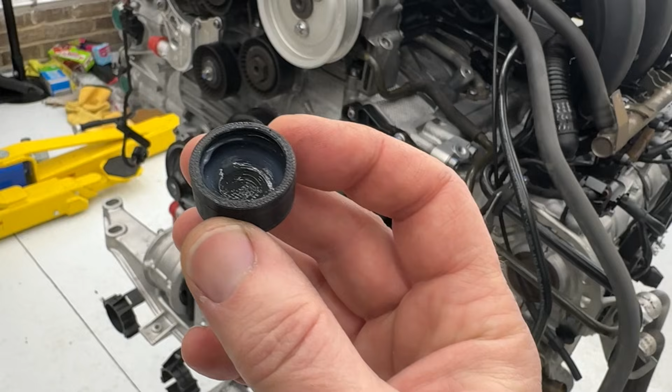All right, I got this cap 3D printed and I got some Dreibond on the inside. Jake is gonna make some of these production versions in aluminum, and you can see there will be a little place for an O-ring, but mine is gonna be the permanent version with the Dreibond. So that is going to go right over here. Smack that on, and that is gonna prevent any future leaks out of that joint.

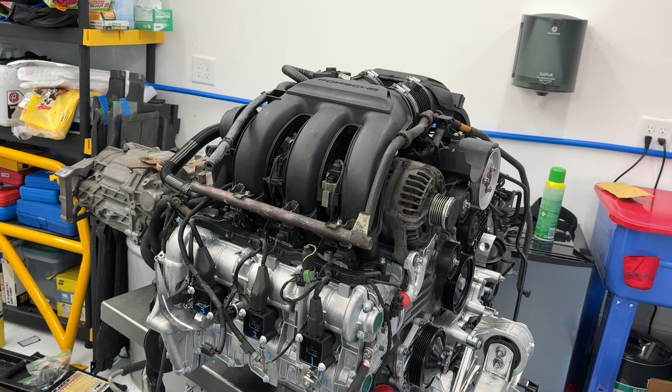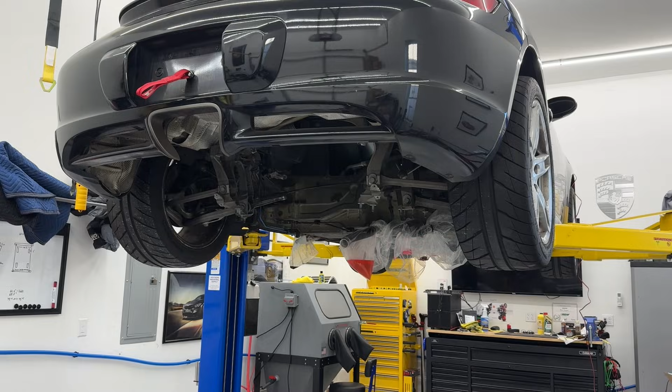And through the magic of YouTube videos, our engine is completed and is ready to go back into here. Pushed the car out of the trailer yesterday, back up onto the lift. I'm gonna cut some of these bags off. I don't know how this bag survived dragging on the ground, in the trailer, out of the trailer, in the trailer, out of the trailer a second time, but it did.

So gonna cut these off, gonna push the engine into position, start lowering the car onto it and making all the connections. So again, did this in the 997 video. Any differences that I do, I'll try to document here, but check out that video for a pretty detailed reinstall.

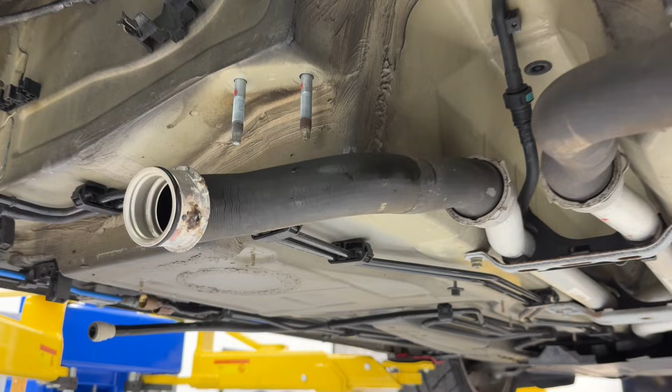All right, this hose right here I noticed is pretty nasty right there. So I'm just gonna take this hose off and vapor hone that area to get it all cleaned up. Seems like it could cause leaky type issues if left like that. All right, this looks much better now.

All right, the other prep that I'm gonna do a little differently this time is this cable here that is our emergency brake cable. These two lines right here and right here have to go tucked in behind this, and they clip in right here. So in the past I've raised the engine and then bent the lines and tucked them in there, and it's really sketchy. It always feels like they're gonna possibly break.

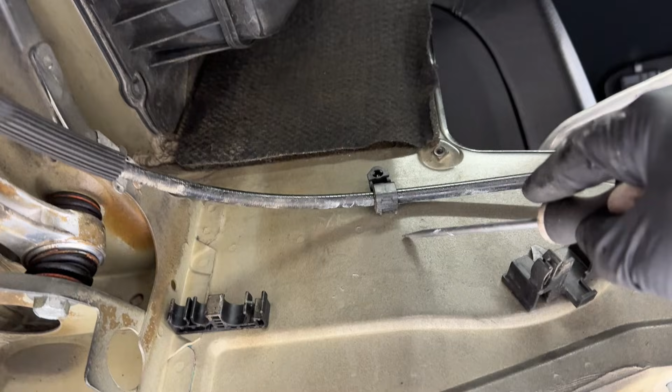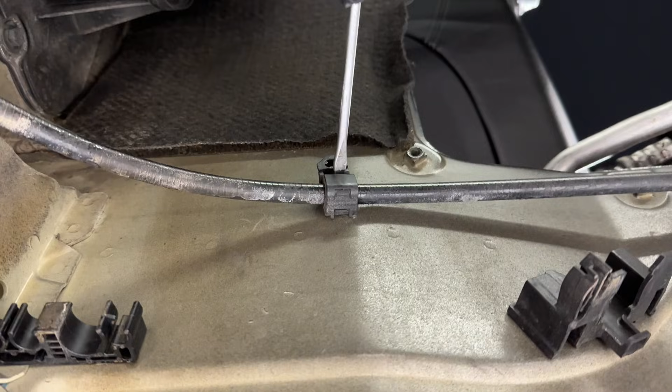So this time I'm gonna try to unclip this from right here because it is a little bit flexible. Maybe I can pull this line out of the way some so I don't have to bend the other ones as much. And I'm trying to remember how I undid this before, if it's just a flathead up here. Try not to break it. Oops, something popped. Okay, I think that's it.

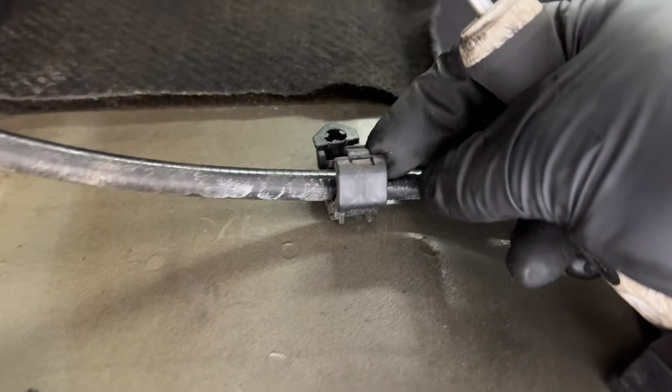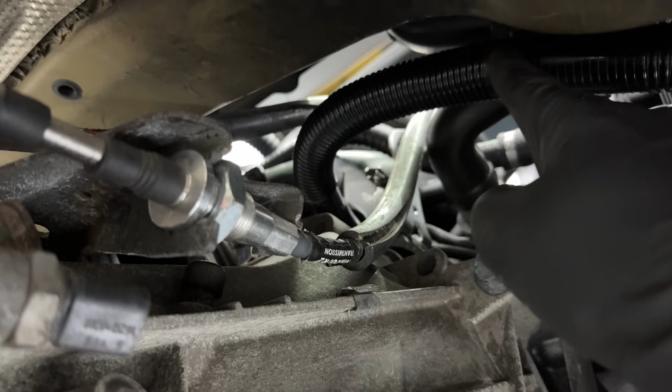Yep. So you just pull down that little tab and it'll unclip it so that this can be loose. And yeah, it gives me a little bit of flex to try to work with this. So I'll leave that like that before starting the engine install. All right, so I had to make sure that I fed my passenger side shifter cable under that hose because it was on top just naturally, and it started getting caught as I lowered the engine.

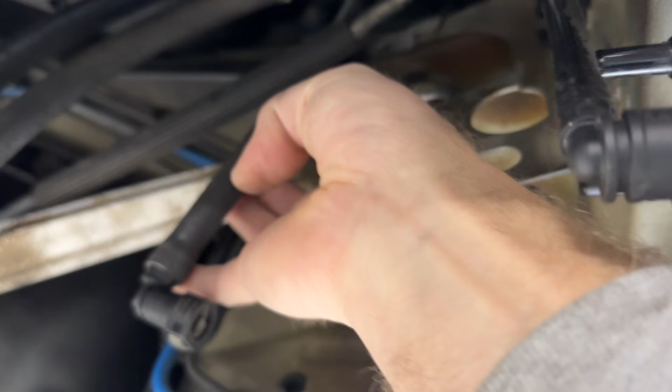All right, so I just figured out the easier way to get these two on the correct side of that cable. When you do loosen it like I did, you do have a lot more play. So you can bend these up this way, and then this one will bend far enough over to tuck them behind over this way instead of stretching it up like I did last time going that direction.

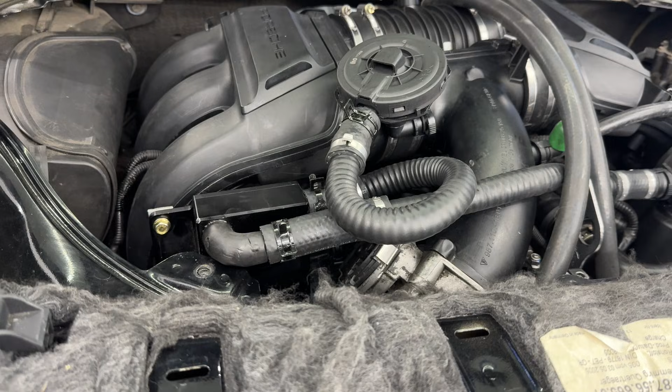All right, so my ultimate AOS, this elbow was catching on the bottom of here, so I had to come and push it out of the way and slowly bring it up and keep an eye on that corner there. I've got enough thread sticking through to get the bolts for the engine mount bracket on.

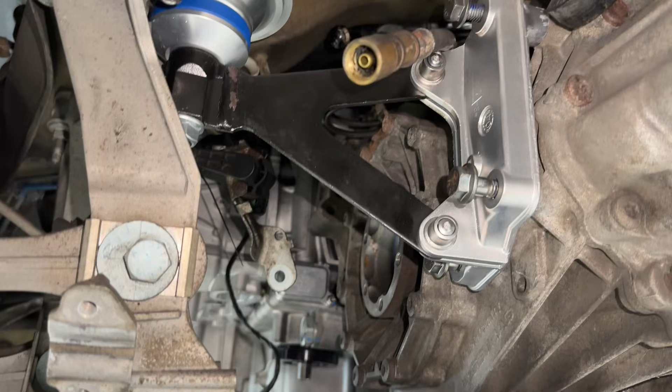All right, putting the transmission mounts back in, bolt through the top, nut on the bottom. These are both 13 millimeter. These go to 17 foot-pounds. These are 15 millimeter. On this side, the longer bolt goes up here, two shorter bolts down here. On the other side, all three bolts are the same size. These go to 48 foot-pounds. All right, these engine mount nuts, all four of them are 15 millimeters, and they go to 34 foot-pounds.

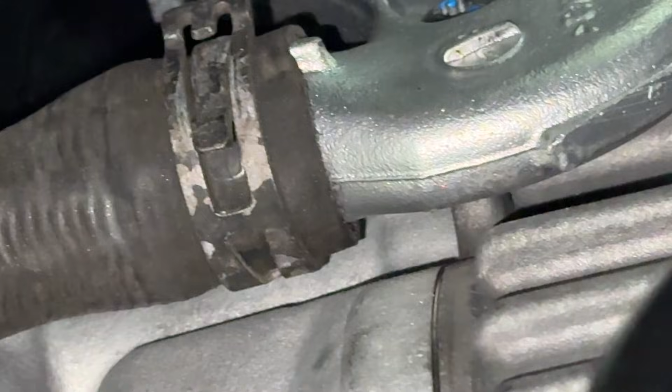All right, one thing I could have done before I put this back on the car is this tube here that connects to this guy. Can't really see it. Let me zoom in. That attaches right up there to that guy. It's a little bit of a pain to get that hose clamp on, so if I would have remembered what direction it went on, I would have put it there. And the direction it runs is it just comes straight down the side, angles into him.

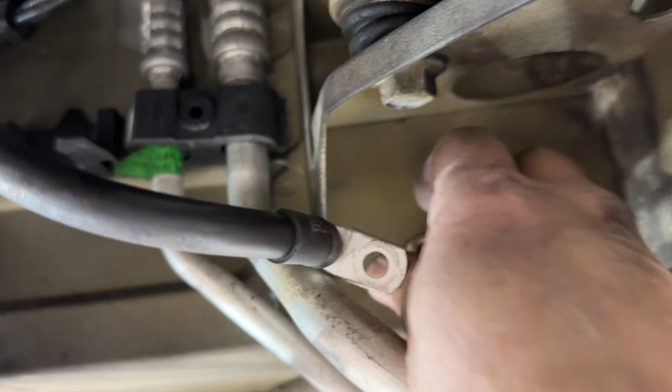I'm just gonna reconnect all my other hoses. Big guy goes here with this clamp. This little guy goes underneath to the green cap. My ground cable, I left the nut up here, so reattach him to the chassis.

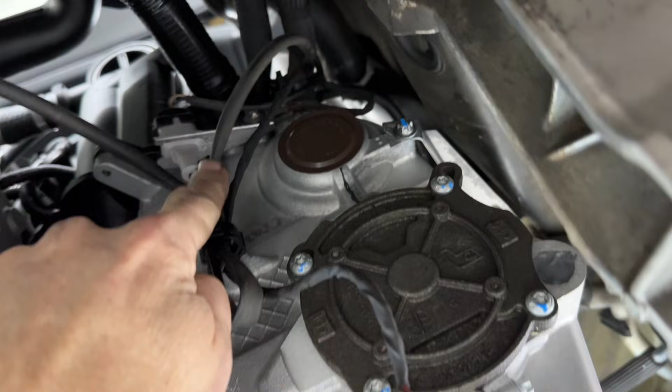All right, here is the bottom of my coolant tank, and this little connector gets connected here. That's the stock one, but this is the one to my Ultimate AOS, so I'm gonna connect him. All right, this cable that was dangling all the way down gets clipped into here as well, and actually goes over to the transmission and plugs in over there.

Our shift cable runs down here, and for us, we're gonna tighten this nut. It attaches into this bracket, and then this ball will snap into place up here.

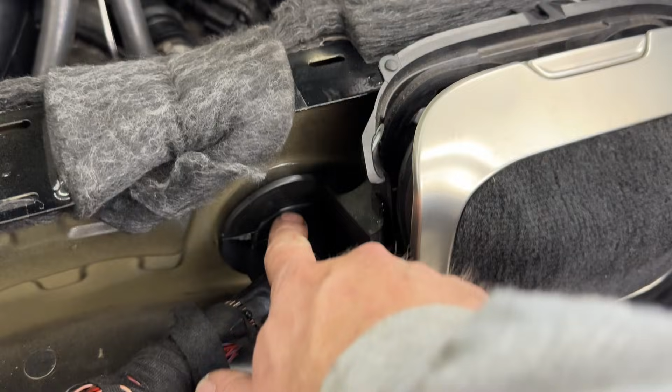All right, here's a fairly large and sticky pain in the ass to get this grommet so that it is even on both sides. It was pretty easy to pull it through incorrectly so that the back of it also comes through, and then there's too much on the inside. So what I did was I got the back part started first, and I got it in there evenly, and then kind of pulled the front around and got the seal to line up.

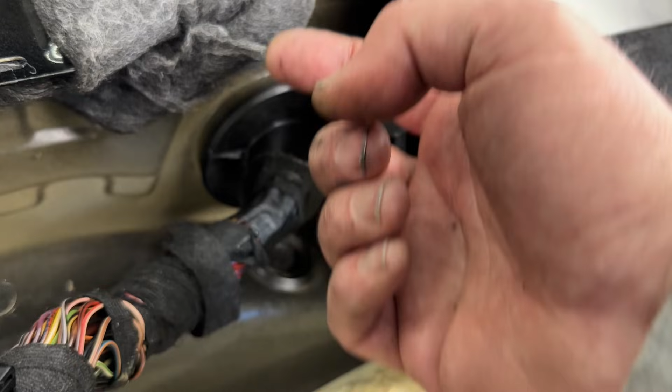After knowing how to do it the first time, it wasn't as bad. My suggestion is if you get too much through, instead of trying to push it back just a little part at a time like I was doing for a long time, just push the whole thing back through, and then start with the back and pull it in, and good luck.

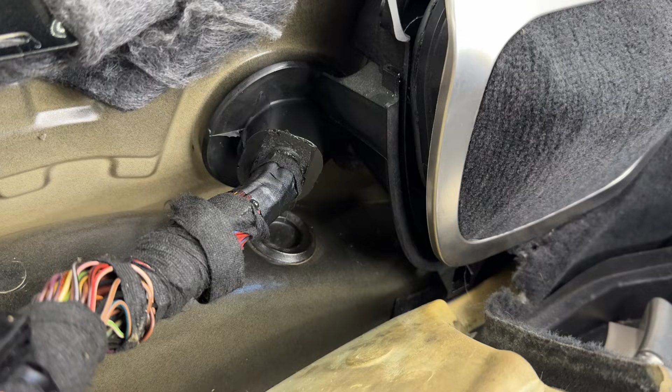So whilst I am up here, I'm gonna go ahead and do a couple other things. Gonna reattach to this tube here. Gonna reattach our fill tube here and lock it back in with a ring. Got our blue line reattached to this line, to the slave cylinder.

My little gray clip that I broke upon removal, I never did buy a new one. So there's supposed to be a little clip right here between the nut and that piece, I guess, to keep it from backing out. And this clip I never replaced, so I just zip tied it there. Both sides of the fitting for that were 15 millimeters.

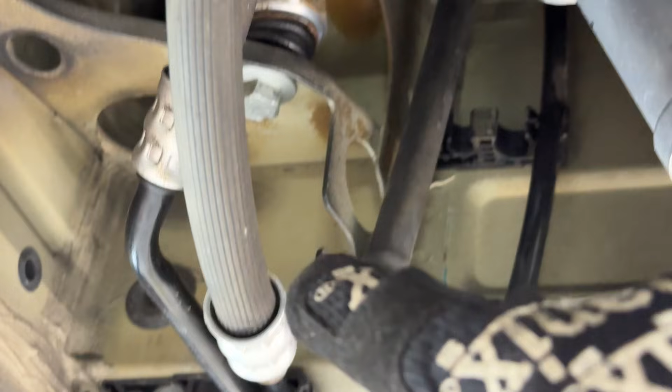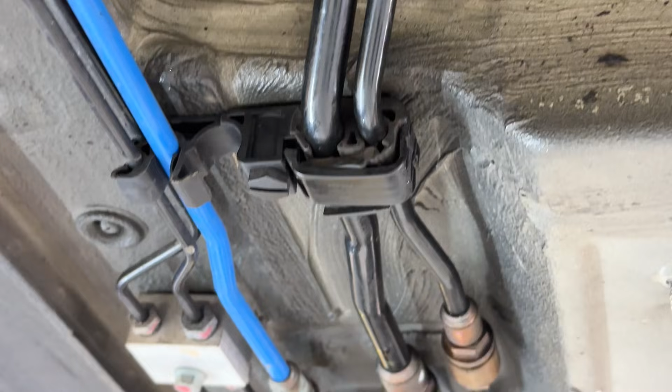And these two lines coming down, I went ahead and reattached like this, and then the rubber folds over, and then the snap folds over, and the same thing right here. So that's how they go. I have to retighten these two. The smaller one, these are also both 15 millimeters. Both sides of this one are 19 millimeter.

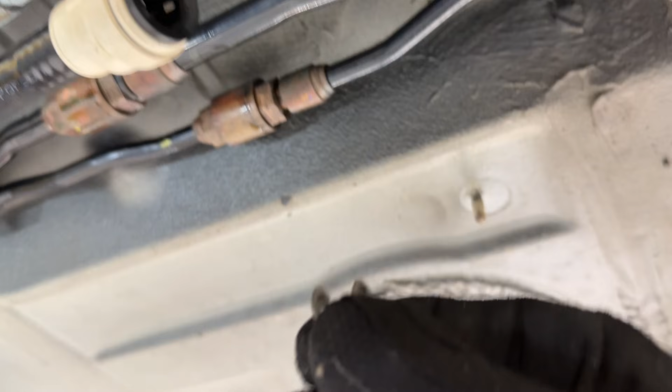All right, so the inside one here had this little gray clip. You can see it looks like that. They're very brittle, and it just slides in here behind the nut, and press that into place and gently hope that it does not snap. All right, that's how it should look.

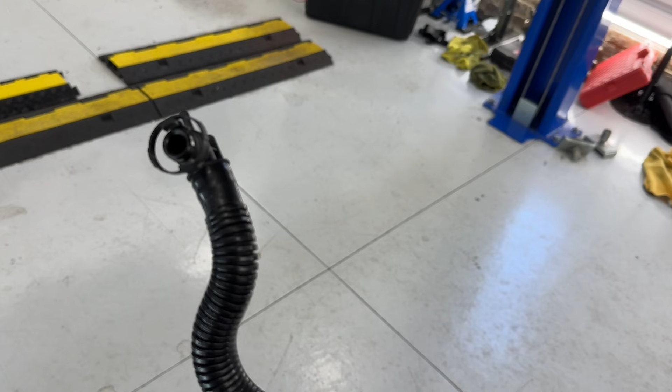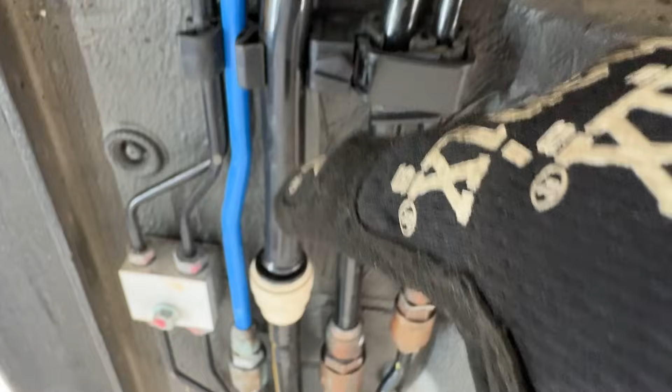I had removed this tube altogether. I'm gonna go ahead and replace it now. This end connects over here. This end snaps on right up there. So here is a shot of how it routes. Connected right up there, comes down over these guys, right into those grooves, and just a pressure fit there.

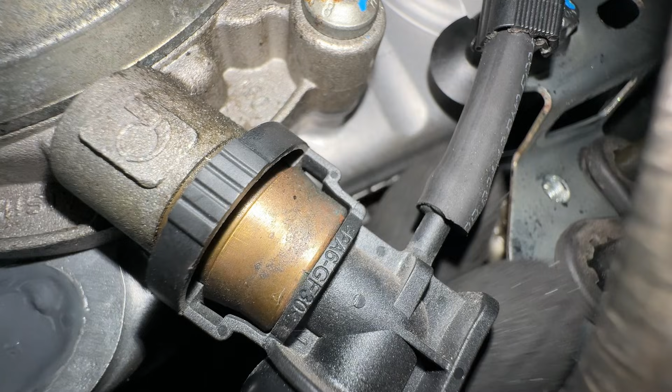All right, also remember when attaching this hose that at the very top of the hose, I don't know if you can see it here. Let me see if I can get my camera up there. All right, yes, right here, this vent line hose that we connected to this little piece when we had the engine out connects to the little nipple on the top of that. So yeah, don't forget that, or you will have a vacuum leak.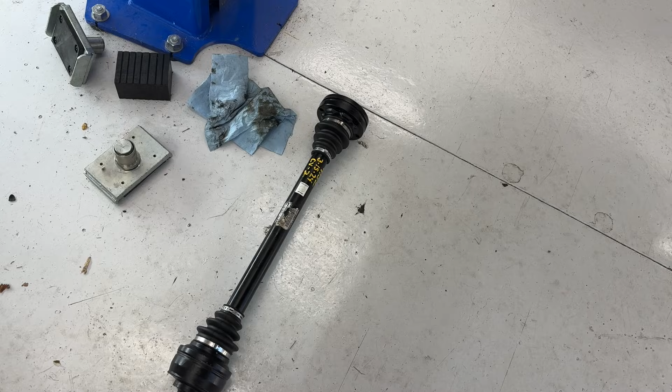I had my axles completely rebuilt while they were out of the car. One of them was leaking. Now they are both super nice, and time to go back into the car. Manual calls for Optimoly HT around the splines. Reading online, it seems like Permatex copper anti-seize is the same thing.

It's like a high temp anti-seize, and it makes sense that you would need it because that did not come off on my other one, and it ruined one of my axles because I could not remove it from the hub. It got heat welded on essentially.

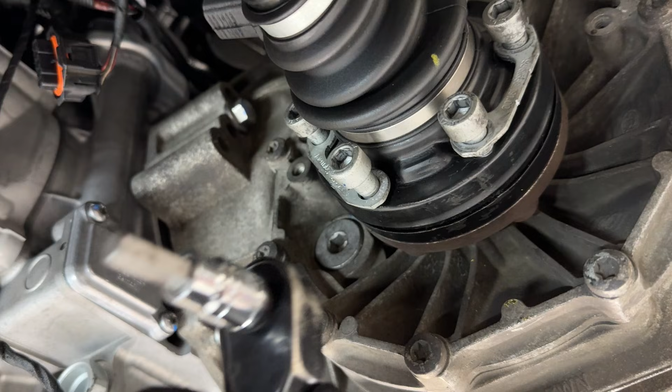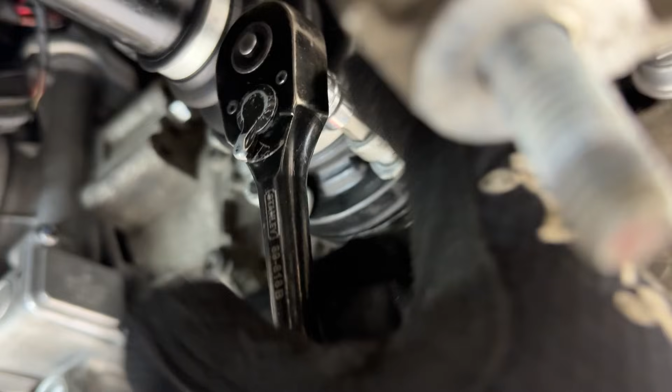All these bolts are 8mm hex, and I'm just going to hand snug them all down before I torque them to value. I did vapor hone them. I'm reusing these bolts. They just need to be clean. The threads need to be clean, and they are gonna go to 60 foot-pounds. And when I torque them down, I'm gonna do like you put on a tire, go opposite, and around. But first, just go around and get them all snugged.

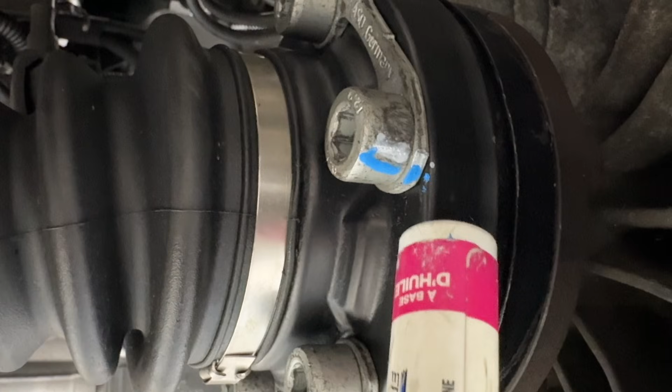And if you need to rotate one so you can reach it, all you have to do is grab a wheel with your emergency brake off, and you can rotate it, and it'll rotate both sides at the same time so you can get them both lined up. Just a couple notes before torquing. Go ahead and set that, and it'll prevent them from rotating. 60 foot-pounds. And when I witness mark them, I'm going to mark the bolt and the washer underneath them so I can just visually inspect to see if that bolt has been backing out at all.

All right, now that the car is in place and I don't have the special tool to tighten the spin-on oil filter adapter, I just used some giant adjustable pliers here and grabbed it and spun it on. Made a couple marks up there, but you know what? That'll be okay. Now I can complete the installation of this thing by connecting this from our oil filter adapter to the bearing.

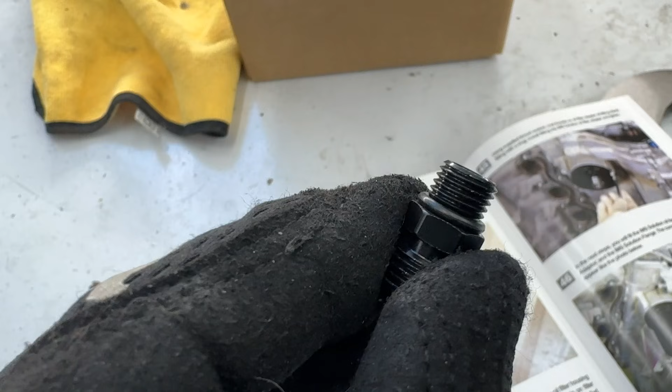Following the provided instructions, I'm going to take this black fitting here and I'm going to put some thread sealant on it and attach it and tighten it to the oil filter spin-on adapter. So put some thread sealant on these threads, and you can see there's a little O-ring on it as well. So this is oriented in the correct position away from the headers.

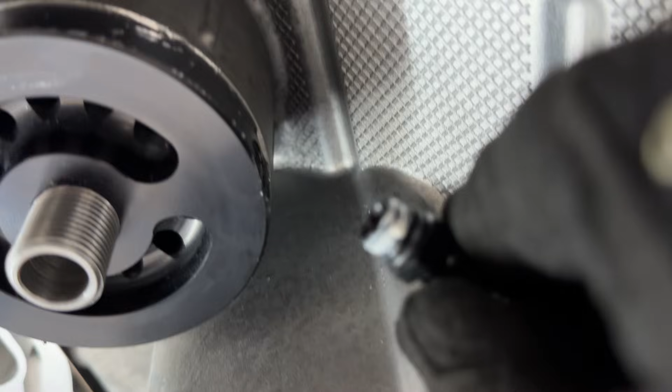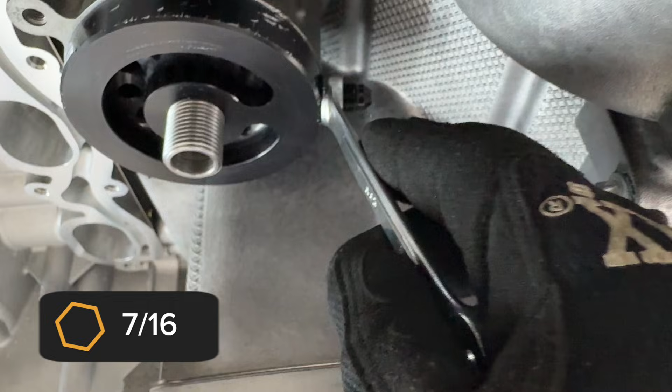And we have our sealant on here. Just gonna start it hand tight. Tighten this down with a 12mm. This fitting is actually a 7/16, so okay. Snug him down. Next, I'm gonna take our little 90-degree adapter and attach it here. I'm just gonna do these things hand tight for right now. So just get him in place there.

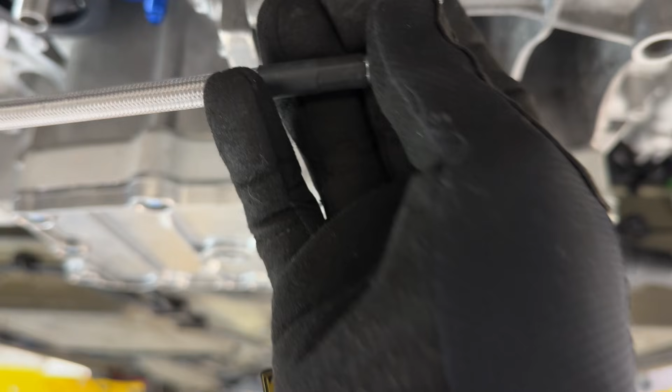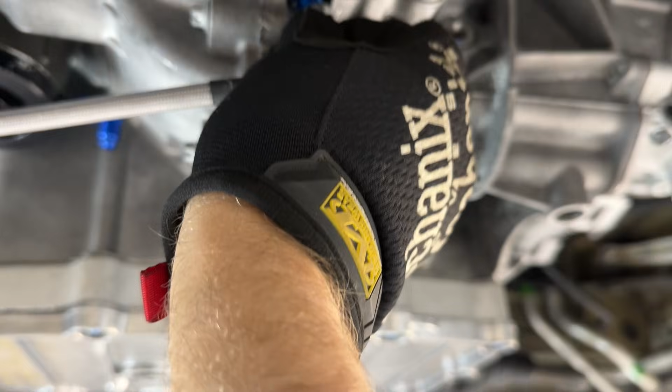And then this braided hose, the 90-degree, is gonna go right here into the bearing. So this is what we installed earlier while assembling the engine. And finally, we will hand tighten this part onto the adapter. Then once everything is in place, we can go ahead and tighten them up, and you can use thread sealant that was included on these fittings as well.

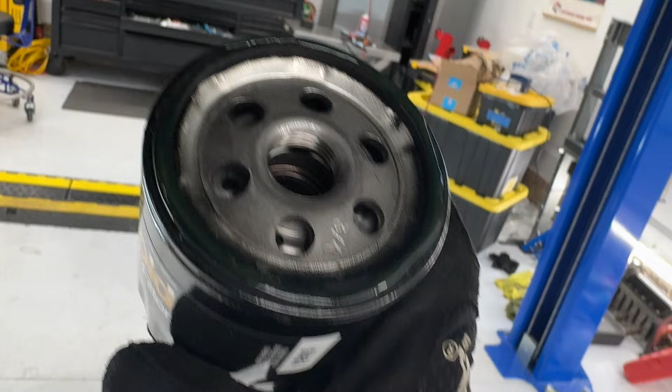All right, so that is the final orientation. This is gonna be up level, so we'll not get caught on anything. And all three of these final fittings to tighten are 3/4 inch fittings. So just tighten them all down. All right, got the Napa Gold spin-on filter that came with the kit. Applied a little bit of oil around the gasket there. And the beauty of the spin-on filter adapter.

All right, cleaned up our safety cable, slid him up here, put a bolt through that side, nut on this side. We're gonna tighten him up. All three bolts for the AC compressor go to 23 Newton meters.

Oh God, all right, this is me from the future. Put this power steering pump reservoir thingy in before you put this thing in the car. I'll try to put this in the video around that assembly time, but before you put this frickin' pipe on, because you need this off to get that in there. So I'm gonna have to take this pipe off in place with this crap over it. And it's gonna be a pain in the ass to fit that down there. So do yourself a favor and don't forget to put that in.

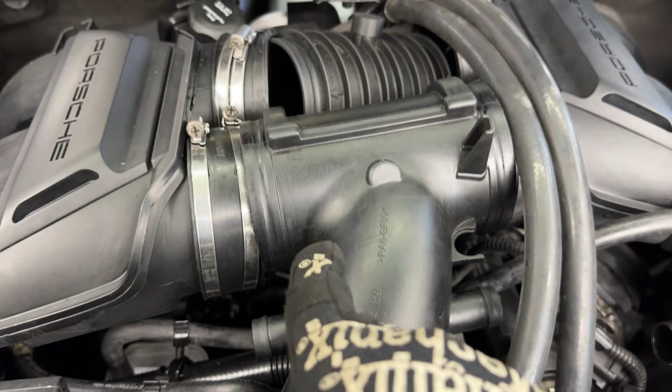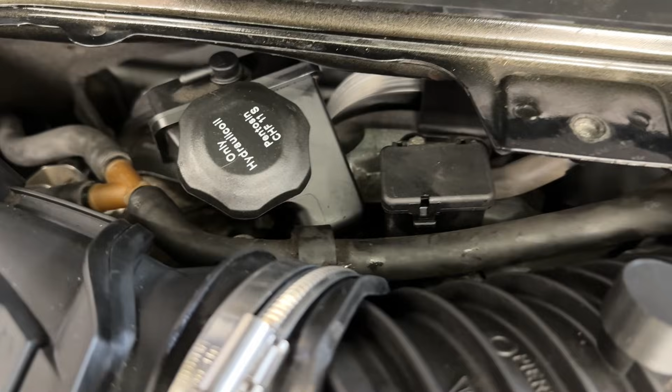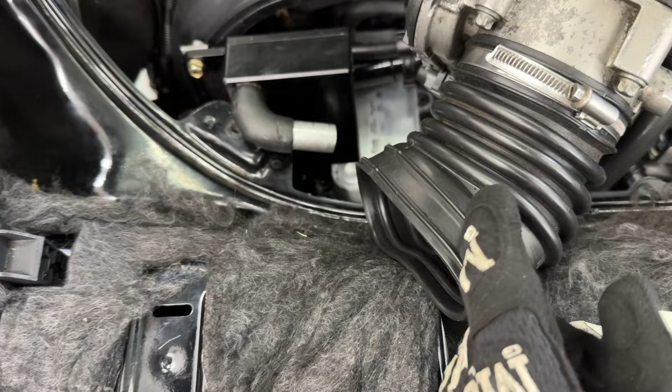I had to disassemble this pipe enough to pull it forward so that I could pull that one that far forward, and then I could just barely fit that back down in there where it belongs. You need that much room to be able to get it in. Oh my God, this thing is a pain in the ass to put on, and I've done it like 12 times already. This thing is a ginormous pain to get on and fitted onto that pipe down there.

So I'm gonna try to put... I can't even think anymore. This guy down there, it looks like there's kind of an alignment mark there with something, and maybe that's where it's supposed to line up, but it seems too far over. I don't know, I'm just gonna try it like this.

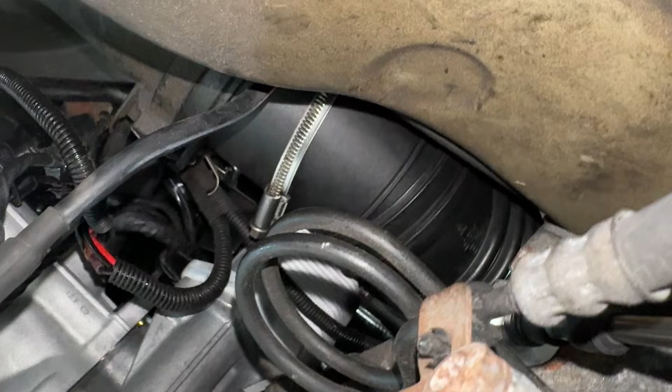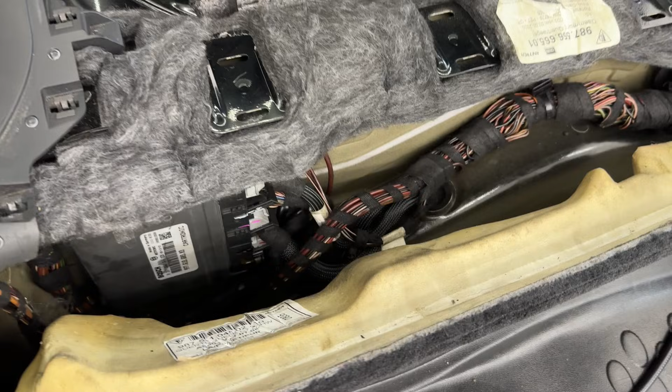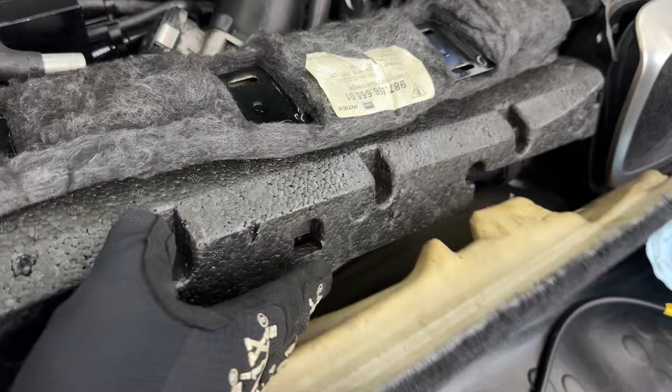All right, so from the bottom of the car, I was able to reach up there and pull the rubber boot over this guy, and I can tighten that band clamp on him. I used my previous color codings from when I removed them to reclip all of those, attach the wires back to that ground, clip the two back in there, so all of our wiring should be back together. I broke this foam stuff when I was sitting on it doing some of this work, so I'm gonna try to jam it back in there.

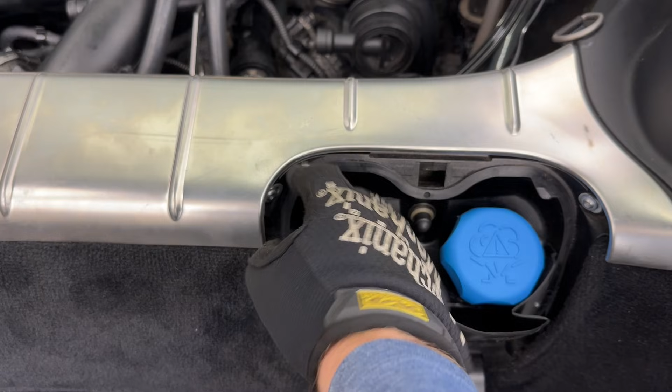All right, snap that rail back into place, and in my removal video, I was wrong. You do have to unscrew those two because they are little tabs that are part of this that fit down in there. Pulled up the mass airflow sensor, need to connect that right down there. All right, this fan down here has a little connector somewhere. Feel for loose wires. Oh, I felt it. I think I just knocked it down further.

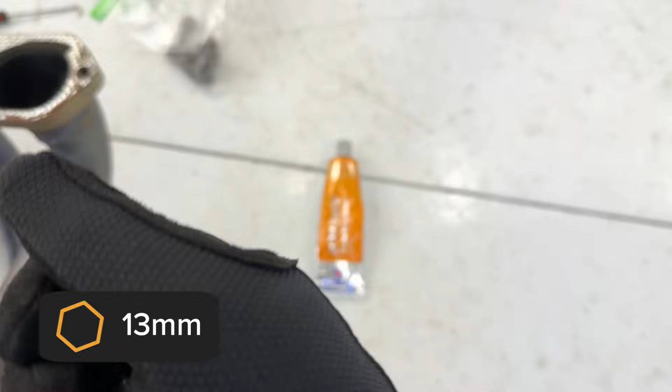Time to reinstall these beautiful Soul catless headers and the rest of the exhaust system. Just got a little bit of my high temp gasket sealant on here, copper stuff. Got the bolts, let's put them on. My exhaust bolts are 13 millimeter and go to 17 foot-pounds.

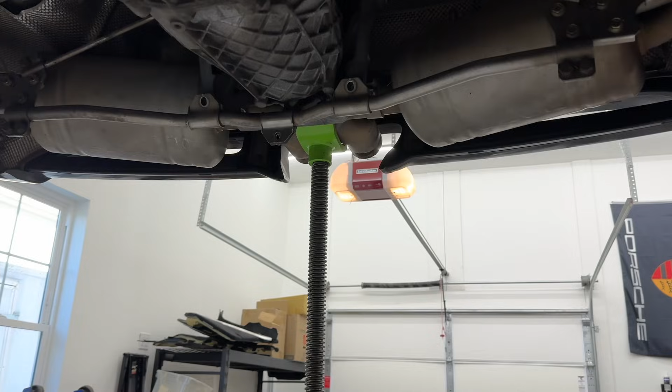All right, for the exhaust install, I torqued the headers up first, and then I kind of lifted the whole exhaust body up into place and supported some of the weight with this. And before tightening other stuff, I gotta start the bolts through here. I got some more liquid gasket with metal gaskets in there.

And then I slid the poles back up in here and got it set on top. Got the bolts just started. So those are gonna hold it in place. And then I can line these up, get these 3 bolts in at the bottom.

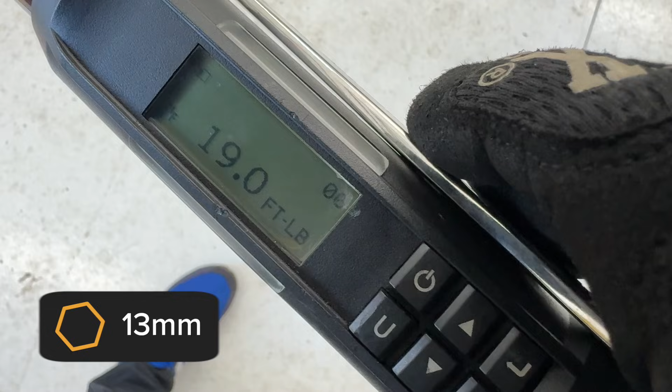But yeah, you need to be able to move it around to get the bolts started that go between the header and the rest of the system. All right, I'm gonna torque these up. These exhaust flanges go to 19 foot-pounds. Oops, I don't have it on. All right, these go to 19 foot-pounds, and they are 13 millimeter, at least mine are.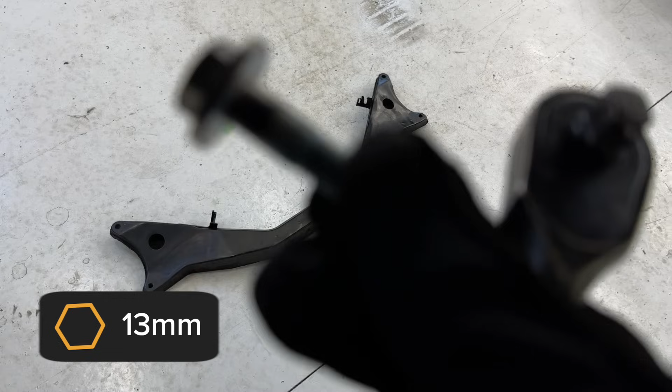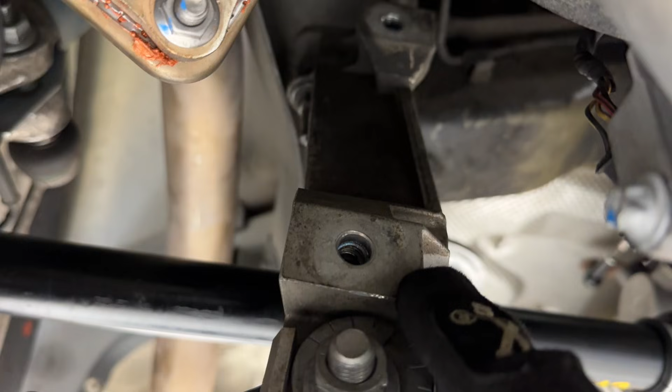All right, the 3 bolts holding this big support bracket on are 13 millimeter, and they are gonna go to 17 foot-pounds. Next up, we're putting this big cross member back on with these 4 15 millimeter bolts. And remember, one of the bolts that holds the cross member on goes through and also holds on this little bracket. And remember, all 4 posts where these screw in actually have a little metal piece that has the threads in it that can come out. So you gotta make sure that they're in there so you have something to thread into.

All right, so I got the 2 bolts started over here on the passenger side, and you will see that they probably won't line up over here on this side. They're too far apart. So I remember last time I used a ratchet strap to pull the wheels closer together, because this is part of the bracing that holds them together. So now they're too far out. So from the back of the car, I've just got one hooked around on this side of the suspension, one hooked over here somewhere. And now as I tighten it, it will draw these pieces together, get those holes lined up.

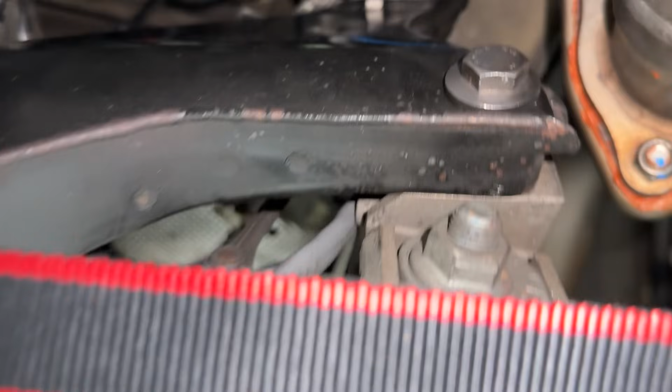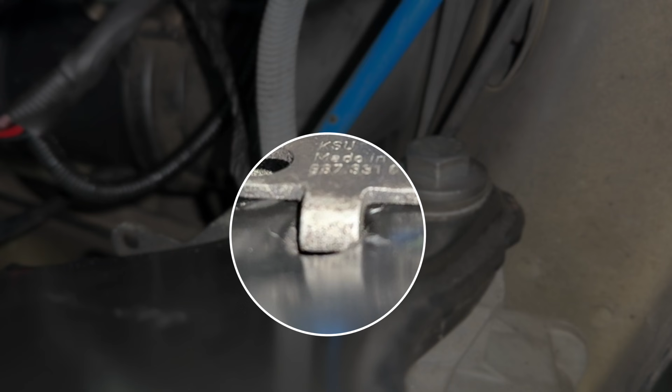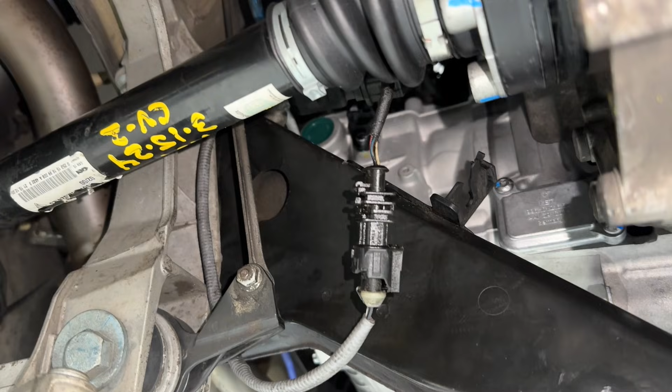All right, our bracket is lined up, and don't forget about this bracket up top. That little pin right there, there's a hole in this bracket that goes through, and the bolt goes through it. Then on the other side of it, we have our little connector that we have to reattach. And also on top of this brace is the little black clip where our oxygen sensor clips into to keep itself out of harm's way. Let's see. There we go. Should slide right in there. All right, so those 4 bolts are going to 65 Newton meters.

All right, so when I started putting this bar up here, it was interfering with the way I had this installed because it was coming out a little too far from the IMS for the IMS solution. So I just had to reposition it a little bit and re-tighten it there so it did not make contact.

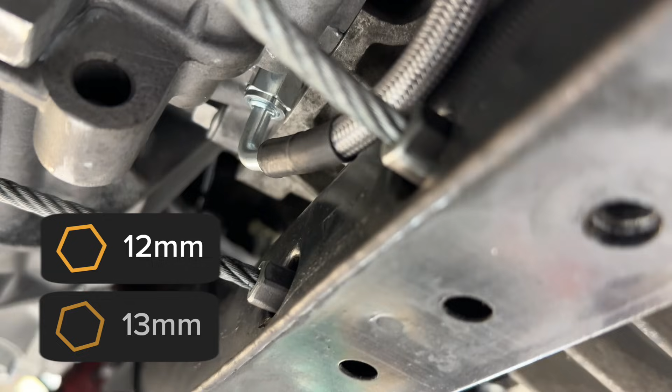All right, I stuck our safety cables back through, put the nuts on this end. The nut side is a 13 millimeter, and on the back of it, you can get a 12 millimeter to hold it still, because when you tighten it, you don't want these to twist. So you hold it from the back and you tighten it from the front, and we're gonna torque them down to 23 Newton meters or 17 foot-pounds.

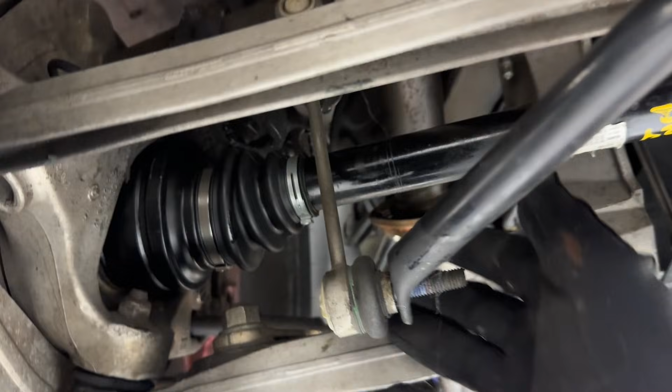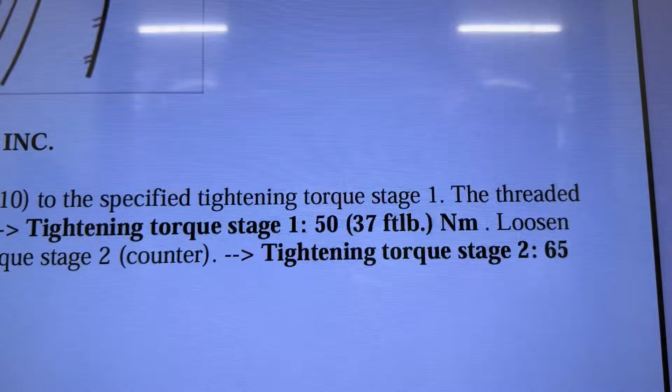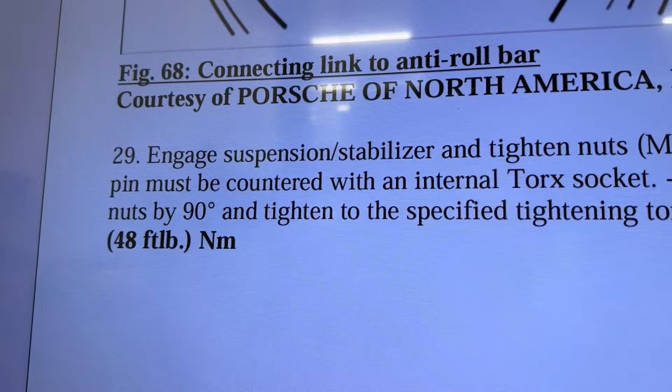All right, next up, anti-roll bar. I just have them in place, just barely started these threads to get it in. Pull this link inside of here. So first we're gonna torque this up, and the tightening stage 1, so you go to 50 Newton meters, then you loosen it by 90 degrees, and then you go to stage 2, which is 65 Newton meters or 48 foot-pounds.

This is the nut you're tightening. It is a 16 millimeter on the back end. And as you're tightening it, as you can see on the inside of this thread, you have to put a T27 to keep it from spinning because there's no nut on the outside to hold onto. After you use this combo to get it snug and pretty tight, it will stay there by itself. Then you use a torque wrench and a regular socket to get it to 50 Newton meters. All right, so now we're gonna back it out 90 degrees and then go to 65 Newton meters. Stage 2, 65 Newton meters. Next, I'm gonna tighten these to 23 Newton meters.

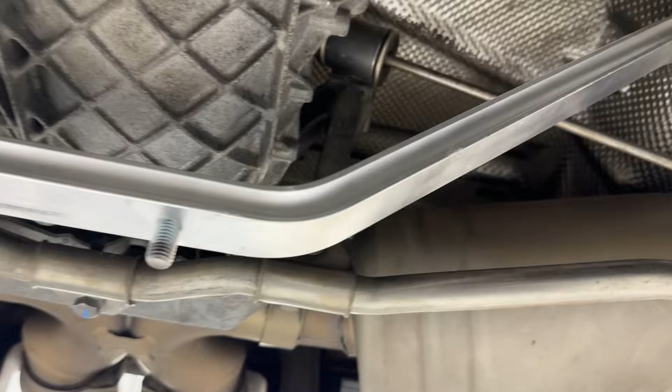Next up is our V-brace, and they go to 65 Newton meters. That's this nice, pretty vapor-honed piece that goes right here. All right, 32 and 33, we're gonna put in the support plate first, and then we're gonna put in the diagonal braces. They all get torqued to the same 65 Newton meters.

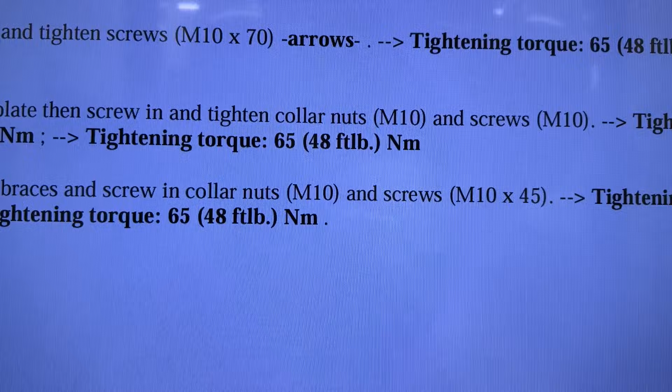Oh, it's a Christmas miracle. It literally is Christmas today.

But all of these just lined up nicely. It's just held in place by force right now. So there's just 2 nuts that go up here, 2 bolts that go back here, nuts, bolts, and then the diagonal piece goes over it, so you always have to remember to put this on first. I usually don't.